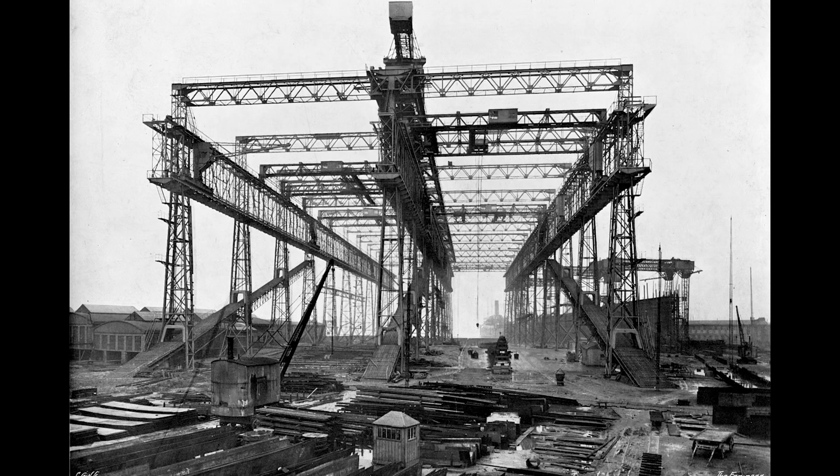This large framework, called a gantry, surrounds the ships as they are built. It supports the overhead cranes and scaffolding used by workers as they construct the Olympic and the Titanic. Notice that just beyond the far end of the gantry lies the Belfast Harbor.

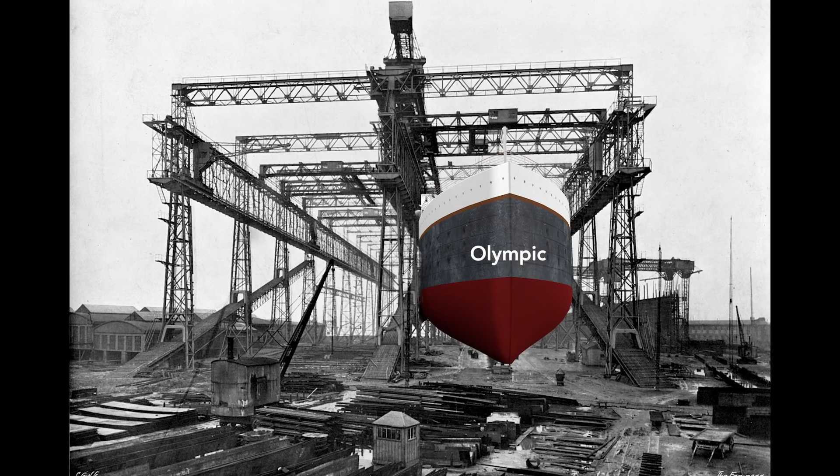Workers will build the Olympic here on the right, and then 3 months later, before the Olympic is finished, they will start on the left the Titanic. When completed, the Olympic stern, or rear end of the ship, will point toward the harbor.

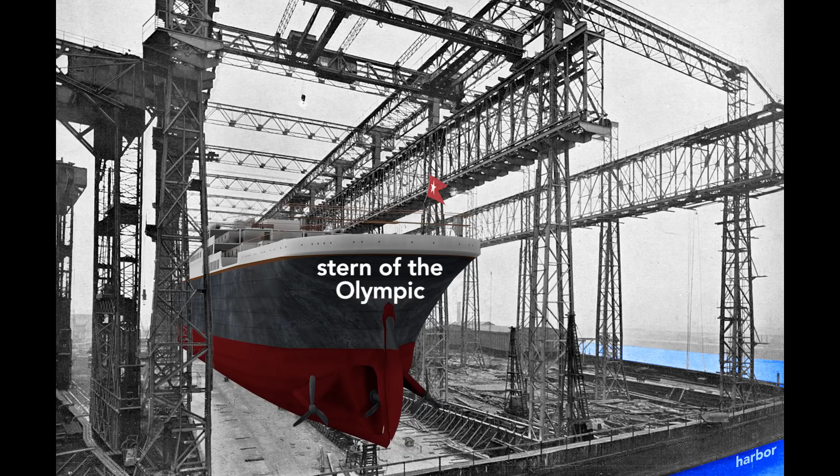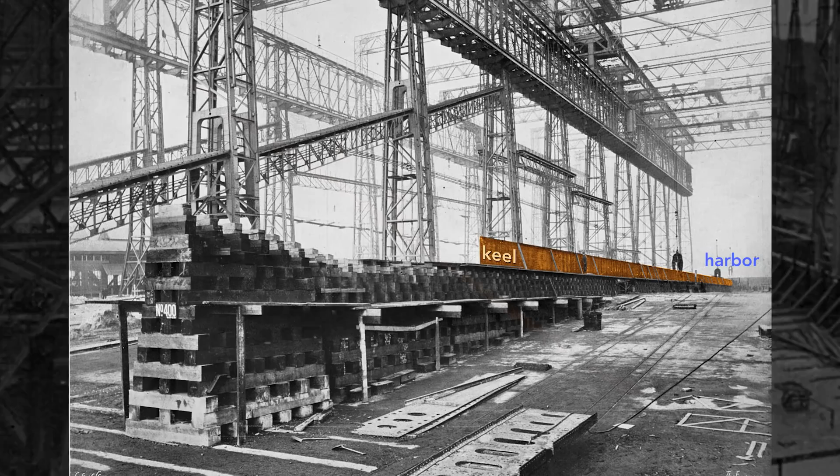The ship's construction starts with its keel, seen here as a long, dark shape. The keel is the backbone of the ship and gives the ship rigidity. If we look at the keel from the land side, we see the keel blocks that support it. These wooden blocks, typically pine, separate the ship from the slip, the concrete floor of the gantry.

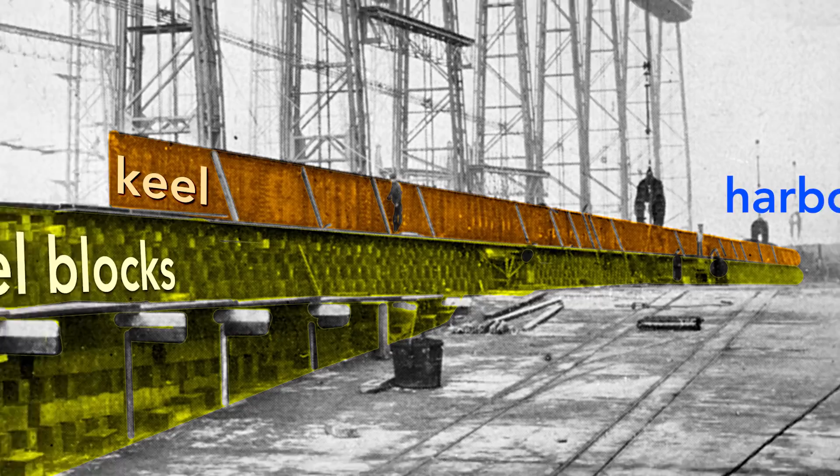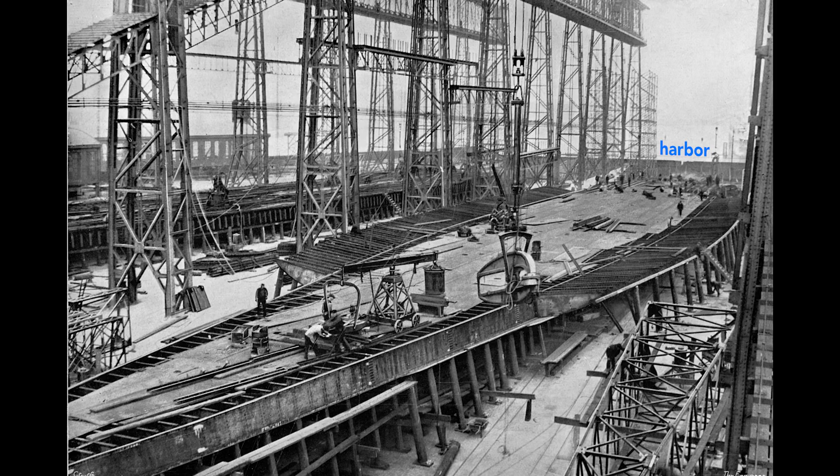It's made of steel plates and is sometimes called the tank top because the double bottom contains 44 watertight tanks. Most of the tanks carried seawater used as ballast to balance and add weight to the ship, but some carried fresh water. In total, the double bottom carried over 5,000 tons of water, or about 1.5 million gallons.

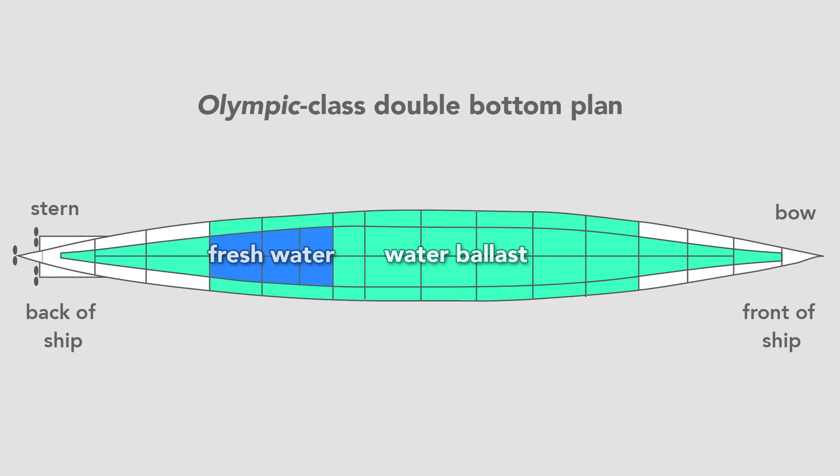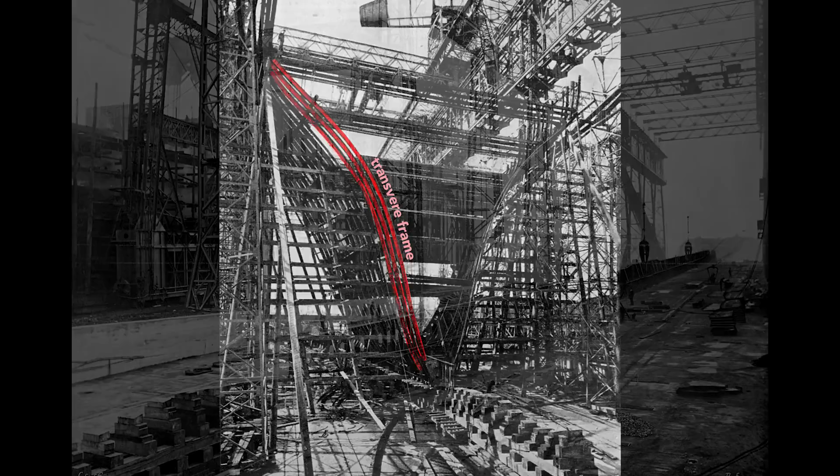Looking closer, we see the rib-like structure on the start of the transverse frame of the ship. Workers rivet to this frame the hull, which will form the skin. So far, we've watched the Olympic's construction. In the gantry, that ship sits here in the background.

In the foreground lies the keel of its twin, the Titanic. Its construction began 3 months after the Olympic. We see here, attached to the keel, the framework of the Titanic's double bottom.

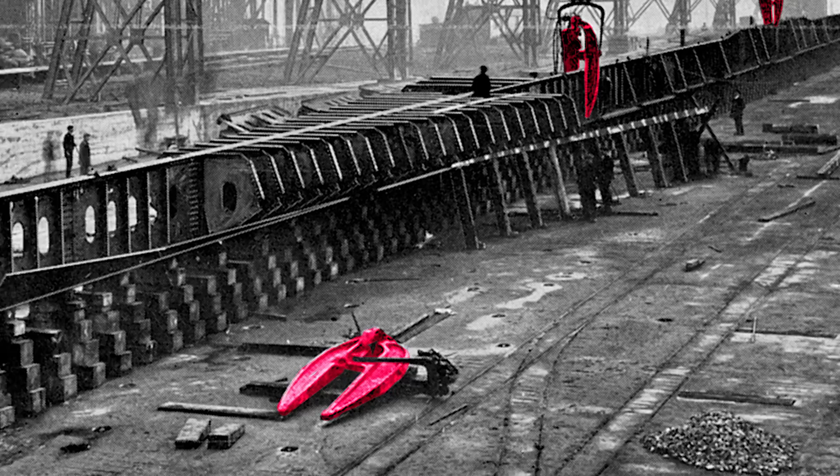Notice this large, claw-like mechanism lying on the ground, and these three hung from the cranes. These are hydraulic riveters, which workers used to install most of the 3 million rivets on the Titanic.

Here we see the almost complete hulls of both the Olympic and Titanic. Work inside the Olympic progresses rapidly. The staterooms are being erected and plumbing is being fitted throughout the ship.

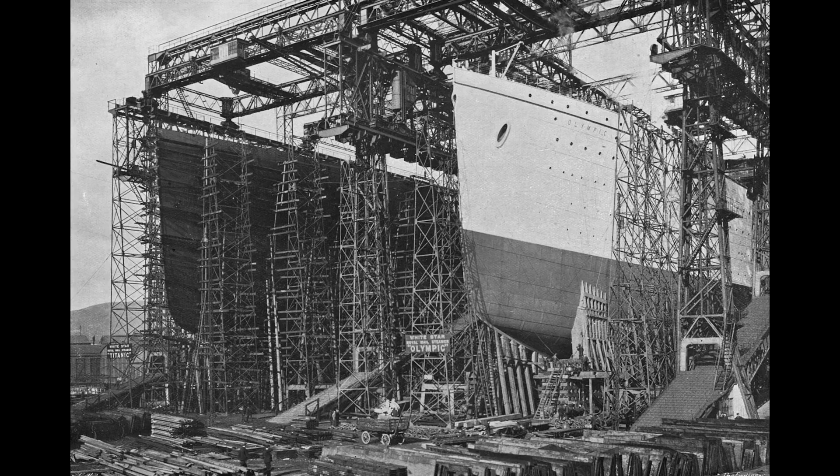To prepare for the Olympic's launch, workers paint the ship a light gray so it will stand out in black and white photographs, although they repainted the ship black soon after its launch so that it matched previous White Star liners. To ease the slide into the water, the slip was greased with 23 tons of tallow, oil, and soap.

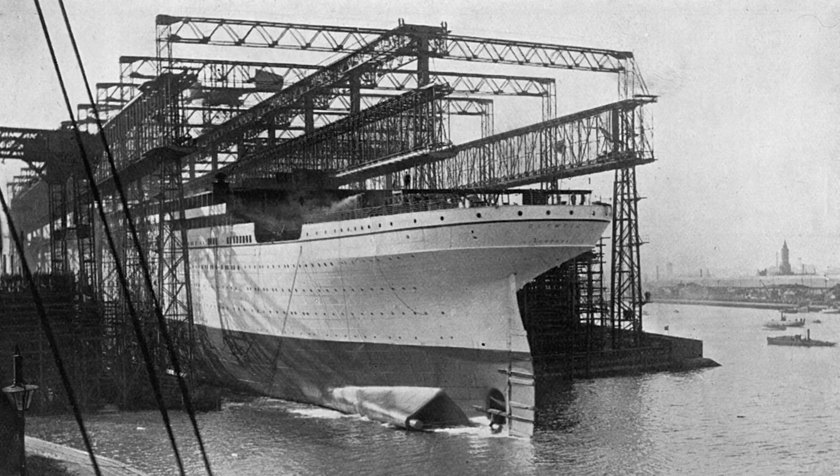And then the order to release the ship was given, the hydraulic triggers were released, and the ship slid into the harbor, reaching a speed of 12.5 knots. Notice that the ship is launched backwards. There are many reasons for this, but among them is that the stern, the rear, is wider than the bow, so it is more buoyant.

In a mere 62 seconds after launch, the Olympic was afloat. The moment the ship hit the water is its official launch date, although it was mostly empty. Here it weighs only about 27,000 tons and so rides high in the water. The draft, the vertical distance between the bottom of the ship and the surface of the water, is only 18 feet.

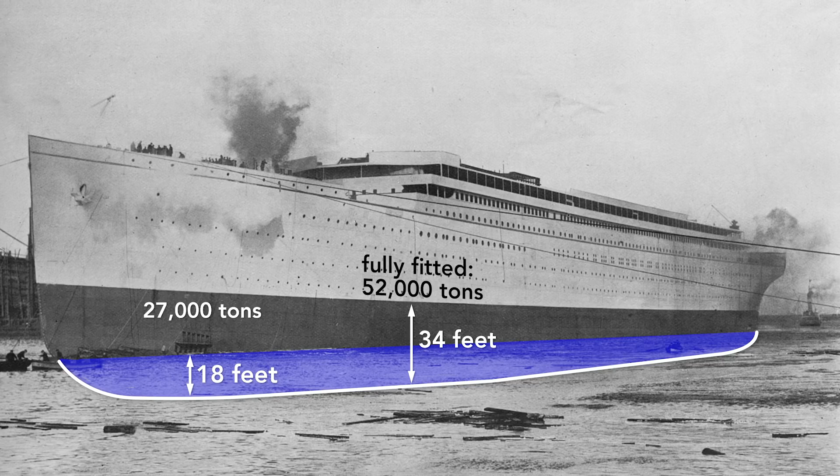After it is completely fitted, it will weigh nearly twice that, 52,000 tons. With that additional weight, the Olympic will drop until the water reaches the border painted on the hull, a draft of about 34 feet. The Olympic cannot move by itself, and so a tugboat tows it to the fitting out quay where a gigantic crane loads the ship.

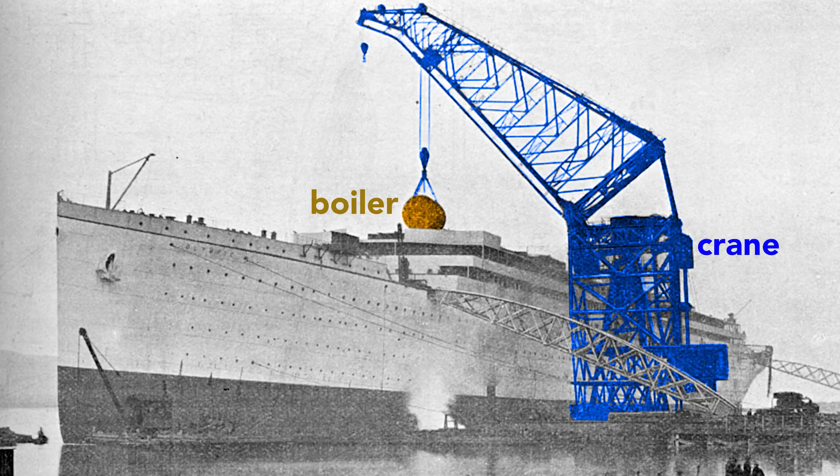Here the crane lifts aboard a cylindrical boiler. The final fitting, including attaching the propellers, is done in dry dock. And then, once everything is in place, the Olympic is ready for the sea.

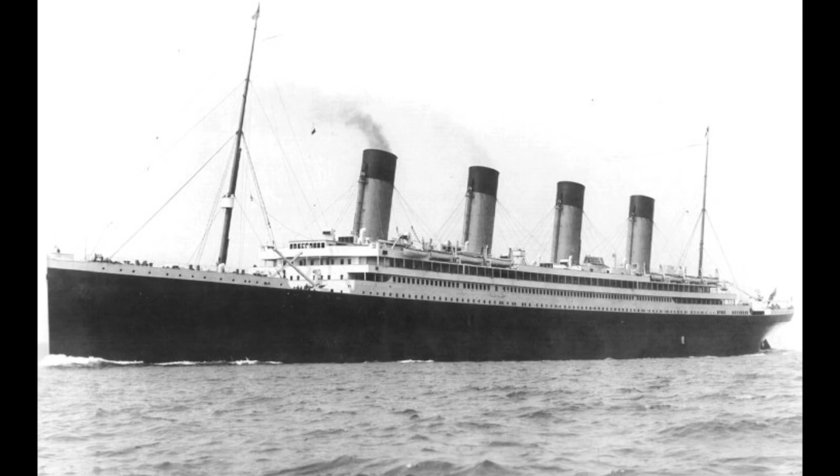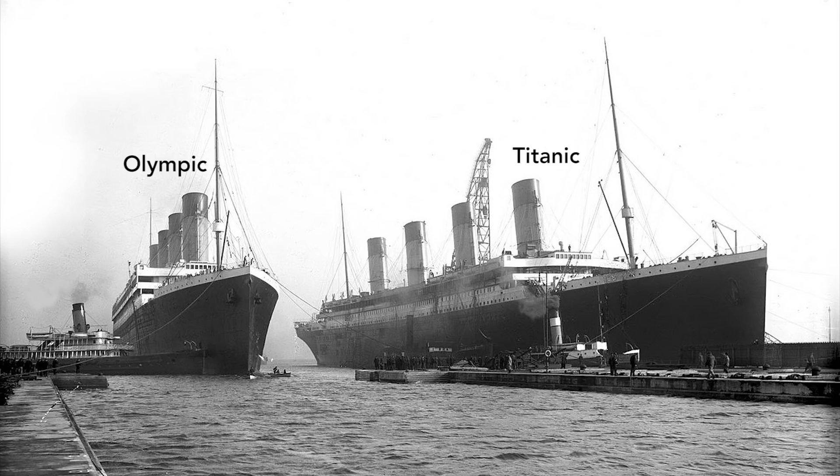Although built side by side, this was the last time they were photographed together. Less than a year after the launch of these two giant ships, one suffered a collision that ripped a gaping hole in its side. That ship was, of course, the Olympic.

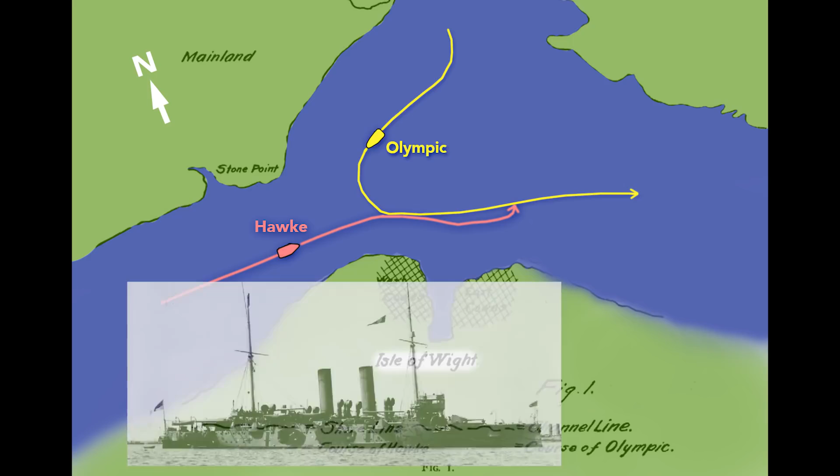In September of 1911, the Olympic departed the port of Southampton, England, sailing toward the Isle of Wight. The Olympic turned into the Solent Strait and passed a British warship, the HMS Hawke. The Hawke's commander was surprised by the Olympic's wide turn, but he managed to take a safe position behind and to the right of the Olympic. The Hawke then increased its speed to pass the Olympic, but the Olympic's wake sucked the Hawke inward rapidly.

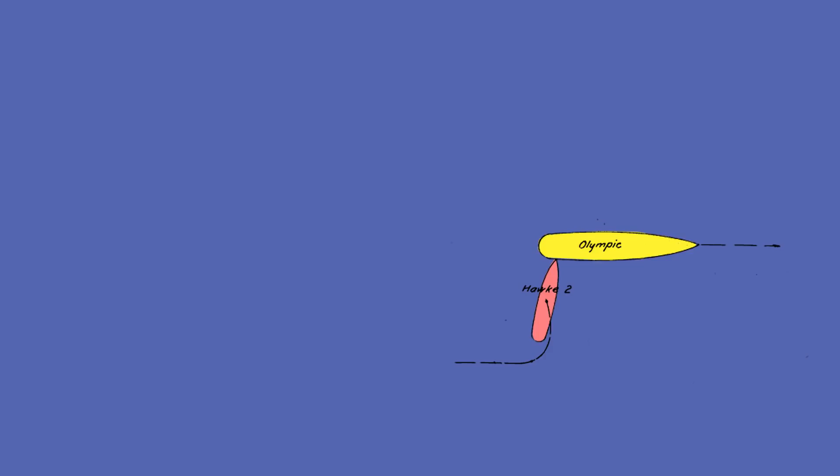The Hawke tore a large hole in the Olympic, and below its waterline, the damage was even greater. The bow of the Hawke was completely smashed in. The Olympic limped back to Southampton, where the holes were temporarily patched with wood before returning to its home dock in Belfast for repairs.

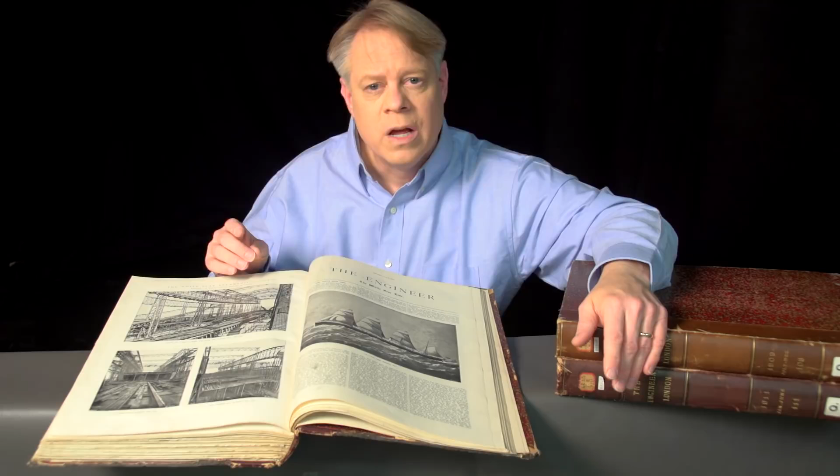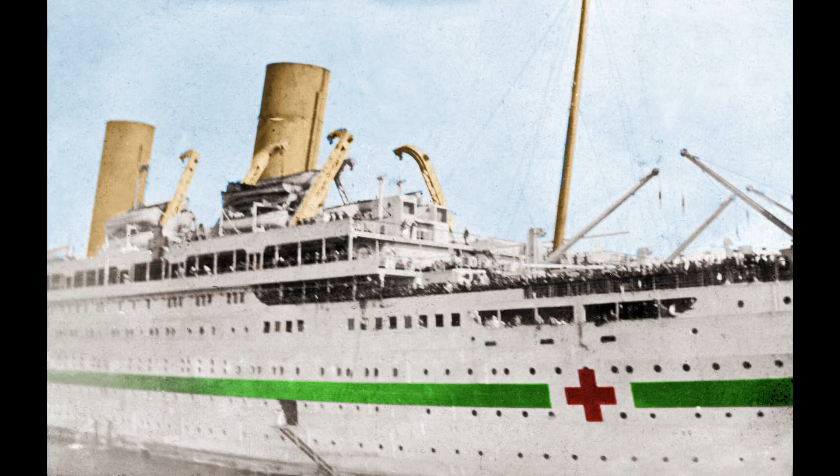The Olympic's sibling also suffered a traumatic blow that caused it to tragically sink. I'm of course talking about the Britannic. The Britannic was the same size and very similar to the Olympic and Titanic. Although intended to be a passenger liner, the ship was drafted into military service in World War I as a hospital ship. While in the Mediterranean, it hit a mine or was struck by a torpedo and sank in less than an hour. Despite these accidents, the Olympic-class ships were great feats of design and workmanship.

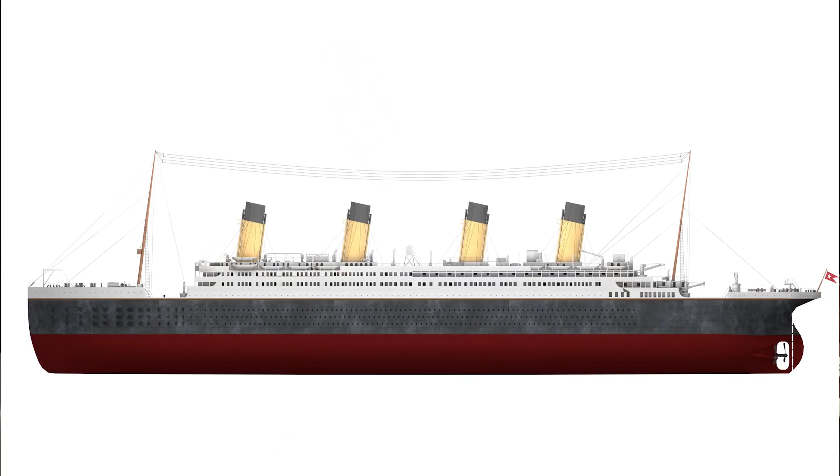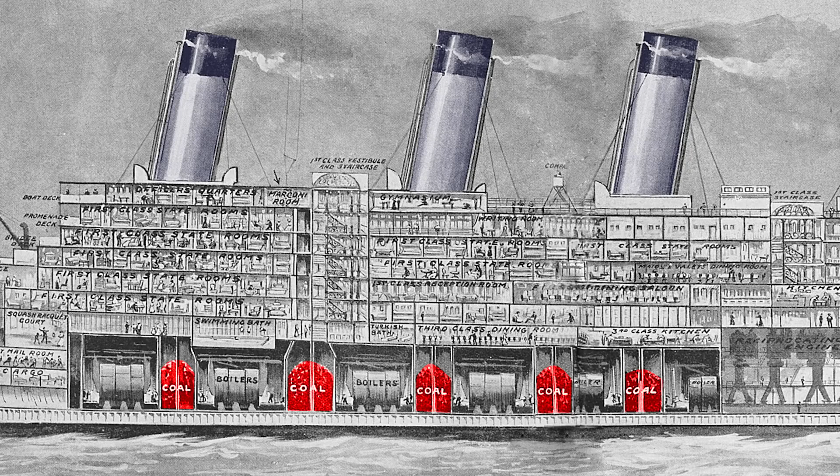Just consider the propulsion system of the Titanic. The ship had two sets of reciprocating engines. These engines were fueled by coal, which was stored along the bottom of the ship. Exhaust gases from the boiler discharged through these smokestacks, which are frequently called funnels. Now, they don't look like funnels until you look at them the right way. They're upside-down funnels. This cross-section of the Olympic shows the boilers sitting atop the double bottom. Exhaust from the boilers is funneled up and out of the ship.

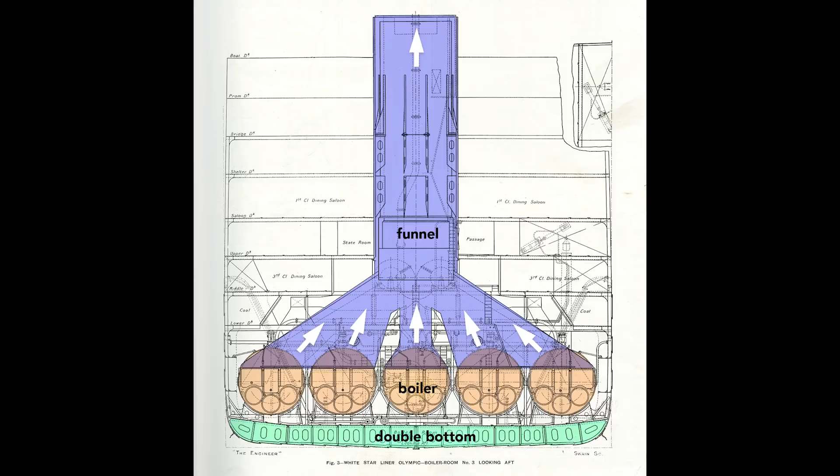It's well known that the aftmost funnel on these ships is a dummy. It was built primarily for aesthetic reasons. Although it did not service the boilers, it was used as a ventilation and extraction shaft for the engine and turbine rooms. The Titanic needed 4,000 tons of coal for a transatlantic trip, which took 24 hours to shovel into the bunkers.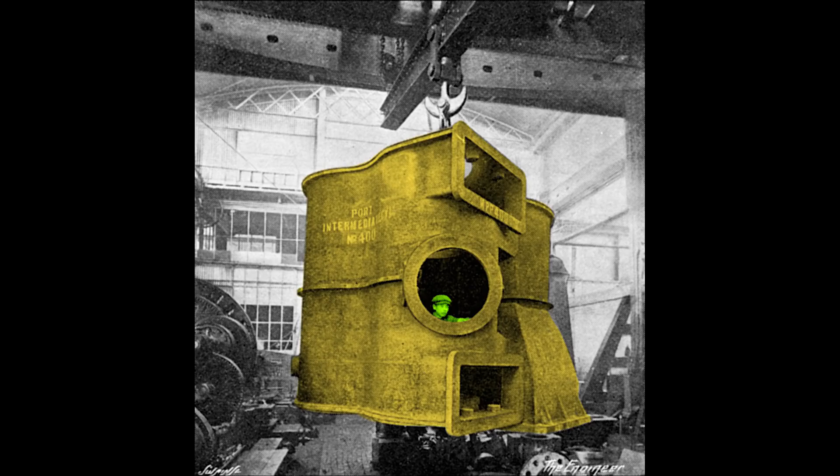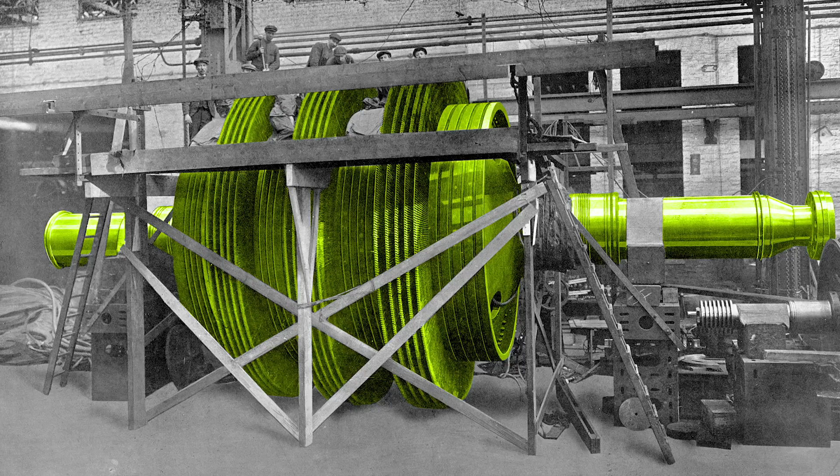Excess steam from these engines was used to drive a turbine engine. This shows the turbine under construction and without its outer casing. Note the workers at the top. This is huge. If you look closely, you can see that the turbine is made of hundreds of individual blades.

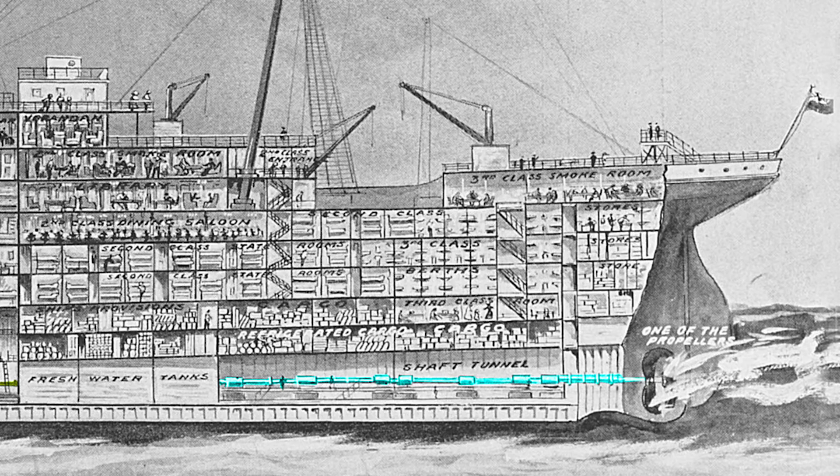A shaft transfers power from the engines to the propellers. The ones on the left and the right were powered by the reciprocating engines, and each propeller weighed 38 tons, while the central propeller was powered by the turbine engine. It was cast as a single piece of manganese bronze and weighed 22 tons. The outer propellers were used for tight navigation of harbors, while the central propeller was used only in open seas. Also, unlike the others, the central propeller could not be driven in reverse, only forward.

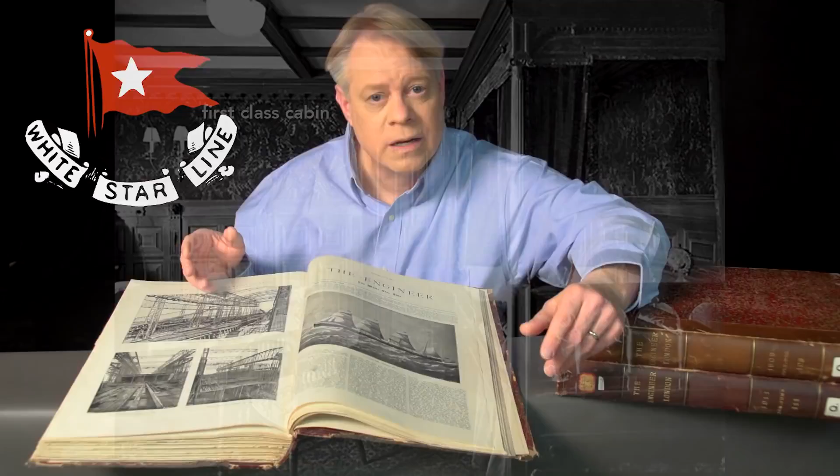Even with this powerful propulsion system, the Olympic-class ships were not the fastest at the time, which was intentional. The White Star Line decided to focus on comfort and luxury over speed. It's clear that the lavishly decorated rooms on the Olympic and Titanic certainly made the passage more enjoyable, but there were some hidden design choices that made these ships the pinnacle of comfort for all classes of service.

The ships were steered using these helical gears. Each ship had two sets of both the spur gears and the beveled gears. These massive gears are nearly 6 feet across, made of solid steel, and each weigh thousands of pounds. Notice the herringbone pattern on the teeth. This pattern allowed a tight engagement of the teeth and resulted in reduced vibration transmitted to the rest of the ship. Altogether, the gearing on the Titanic weighed about 7.5 tons.

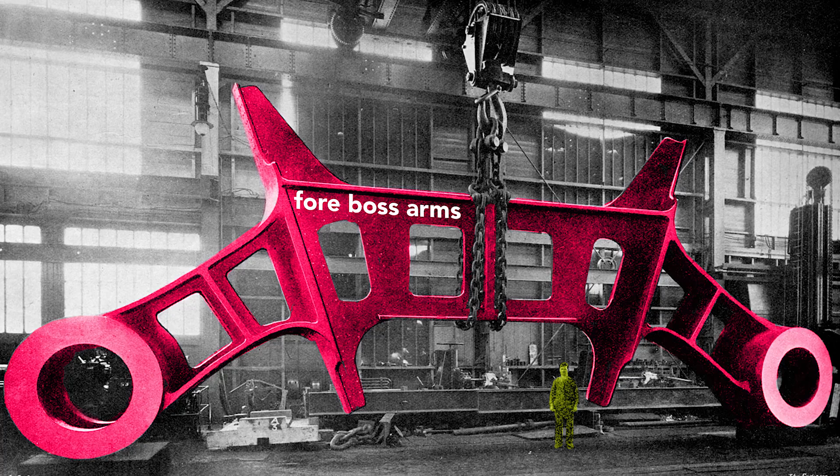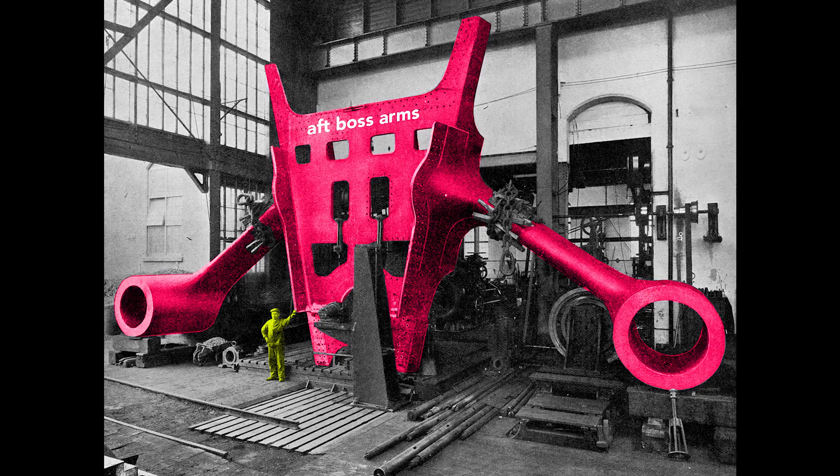This very large structural piece is called the boss arms. These arms held the shafts of the outer propellers in place, and because of their size and strength, they reinforce the hull, which reduces panting. Panting occurs when variations in water pressure, say the crest versus the trough of the wave, flex the hull inward and outward. Less flexing results in less vibration felt by the passengers. These boss arms, also called shaft brackets, were fitted 20 feet apart at the very aft of the ship.

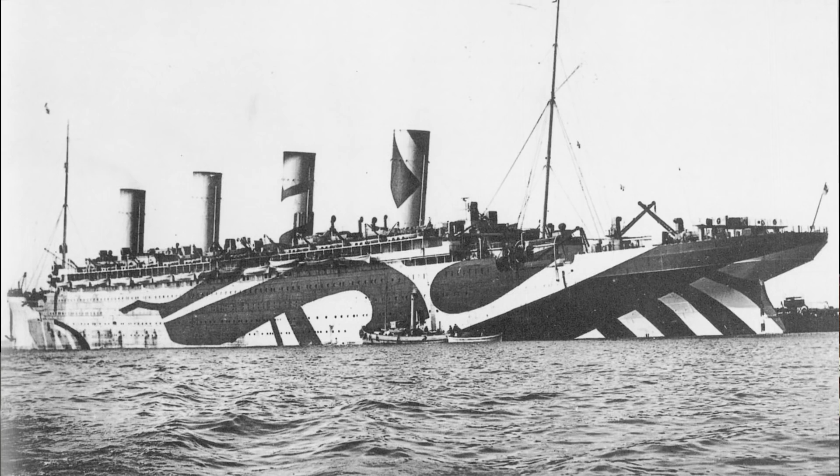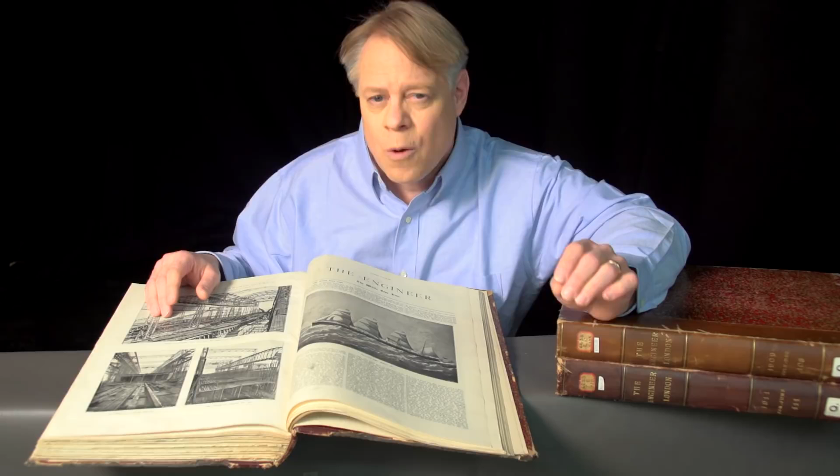While the Titanic and Britannic both had tragically short careers, the Olympic triumphed. In its lifetime, it made over 500 transatlantic journeys, carrying over 400,000 passengers and sailing 1.5 million miles. It even spent 4 years as a U.S.-Canadian troop transport during World War I, earning the nickname Old Reliable. After 24 years of service, the ship was decommissioned and scrapped for parts. The Olympic-class ships were absolute marvels of engineering. I hope it's for their revolutionary design rather than their failures that they're remembered.